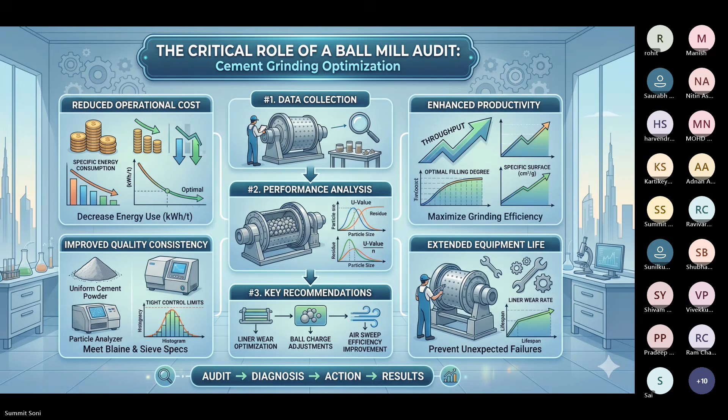Moving on to next - why we do an audit. As we all know, this is basically about numbers of energy consumption in the plant. If we see the energy consumption for the grinding of cement, it is almost 40 to 50% of the total requirement. Since it is so high, it takes most of the OpEx in terms of energy for the plant. So why not strike there first? If you optimize your grinding, you get to reduce your production cost and produce a good quality of cement, so on and so forth.

So, as I was explaining earlier, why do a mill audit? It gives you a very big picture on how your mill is performing. Once you understand that, coupled with your objectives, you can always decide when, where, and how to do the audits. If you want to go for an expansion, unless you know how your mill is performing, any expansion cannot be justified in terms of numbers.

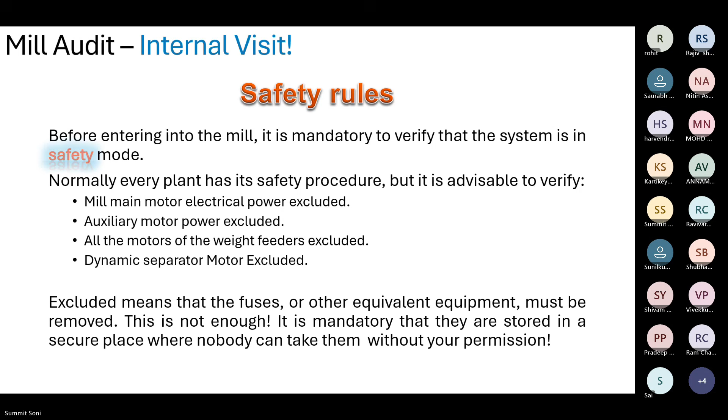Once we exclude it, the owner of the audit should appoint someone responsible for making sure it is locked, tagged, and logged, and it remains in his possession until the audit is over, until samples are collected and taken out of the mill. All collection equipment has been taken out, the sieves have been taken out, there's no plastic bag left inside, not a single shoe should be inside. That's his responsibility to do—usually the HSE guys.

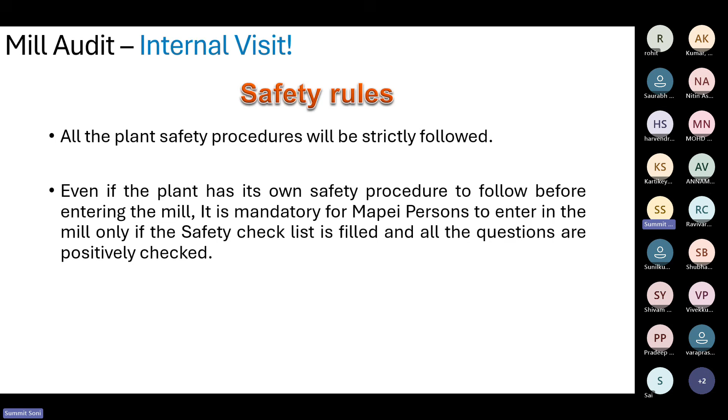Now, audit prerequisites. Any questions till now?

Is the speed okay? Can you guys hear me? Okay, okay sir, okay, perfect.

Now, the audit prerequisites—what we need to run the audit. We just can't decide, okay tomorrow we need to do an audit, let's stop the mill at 12 midnight and get inside at 6 a.m. We need to have a synopsis of the mill operation before.

Usually what I ask the client is for a 2 week log sheet. I study the trend myself, and on the day of the audit, based on that 2 weeks of data, we ask the client to run the mill for 6 to 8 hours at a consistent feed rate, constant separator speed, consistent product quality, no product change, no switching from OPC to PPC to SRC, and the least operator adjustments during this time.

So we try to put the clinker from the same silo. Extraction will be from the same silo, no changes there, usually fresh clinker. The gypsum quality won't be changed—if they're using chemical, use chemical, if they're using natural, use natural. No mixing or whatever, it should be consistent.

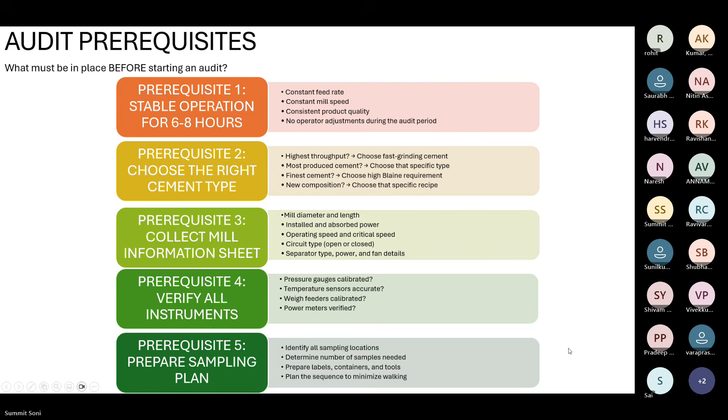Good, so moving on to the schedule of audit, the next slide. When we are starting an audit, there is a certain timeline which we need to follow. So before, let's say, that starts 6 to 8 hours before the running of the actual audit, we run the mill stable, we collect the data.

Before the shutdown, 2 hours prior to that, we visit the control room. We see what's going on in the last 24 hours, how the trend was, what the alarms were - was there any temperature alarm, any vibration alarm, and so on and so forth. Was the mill seal working properly? Is the temperature of the mill seal working properly? What's the mill outlet cement temperature? All those things we need to understand.

Current feed parameters, speed of the separator, fans - has there been a big change in the fan speed or the separator speed? Then we go around the mill. We note down the points where we can see there is false air entering. We identify the points from where the cement is leaking, let's say, and where the spillage is. So all those things we need to understand - leaks, vibration, hotspots, blockages, all those things.

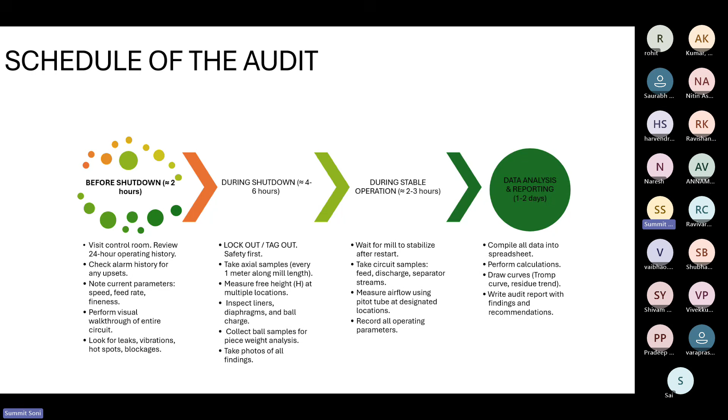Moving on, when we do a mill audit, internal visit, obviously. So the minute that we are entering the mill, the first thing we see is the level of ball charge, the level of material on top of ball charge, the mechanical maintenance state of the mill. Is there a liner that is hanging? Is the diaphragm clean? Is it choked? Is it broken? So on and so forth.

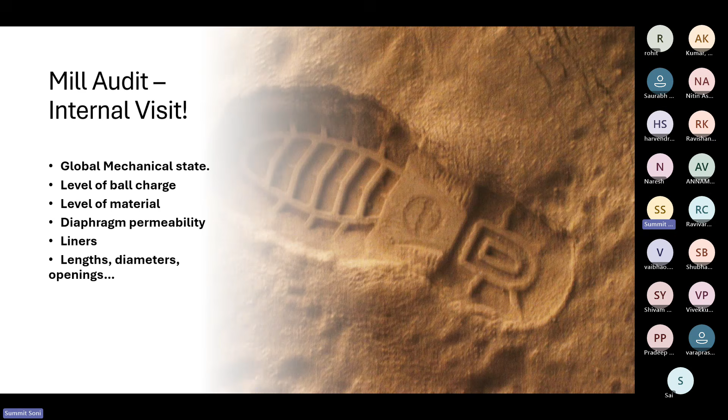Once we are in, we measure the length, breadth of the mill and all those things. Now, optimum material level in chamber one - this is chamber one and chamber two. Now this is a parameter which gives you a first hand review of the mill just by looking at it.

The minute you enter the mill, let's say the first chamber, and you see that all the balls are visible - 90% of your top balls visible - and there's not a lot of material next to the diaphragm, it's obviously not in a very good state of grinding. In the juxtaposition, if the balls are completely covered, you can't see a single ball and there's a lot of material in the mill, that's also not a very good case because then your mill is not grinding - it's being suffocated.

Same thing in the second chamber. The minute you enter and see the level of material on top of the ball, it should be somewhere around 40 to 50 mm on top of the ball. If it is around 50 mm, it's the perfect condition. Your mill is getting the right amount of feed, it is doing the right kind of grinding, the first chamber is doing the right kind of grinding, your diaphragm is doing good - there is no jamming, no choking, nothing.

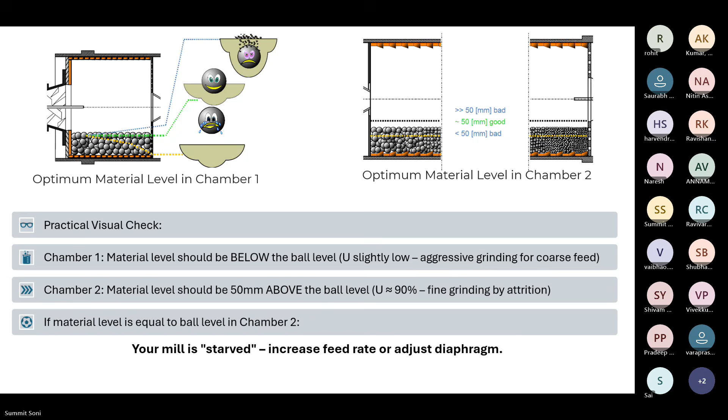Now, when I talk about a mill audit, when I decide to do one, we don't go all ballistic on the mill. I never advise doing all the analysis that is written in the book. Don't do a piece weight every time, don't do a complete flow measurement right at the first step. Very practically, I would advise two or three things to understand the mill and see what needs to be fixed.

Second thing, again, is filling ratio based on voids. If your ball charge is expanded or not expanded, that will also tell you how your mill is operating. The third exercise is axial sampling. When you do the axial sampling, the residue trend, you get to understand how your mill is grinding across the length.

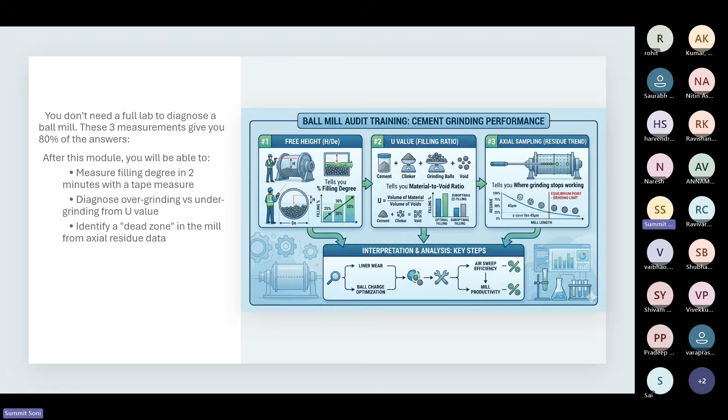So I'll go to the first measurement and we'll discuss a bit on that right now. What do you need for this measurement? You just need a tape, that's it. You access the mill door during the shutdown, you go inside, and you just measure the free height.

That's the distance from the top of the ball charge to the top of the liner, or your reference point. It's usually the top of the liner, the middle part of the liner where the wave is in the middle. So you don't measure at the highest point of the wave, and you don't measure at the lowest point of the wave—somewhere in between, if that allows. If your perpendicular direction hits the top of the wave, make sure you measure all across the length of the mill on the top of the wave, on the liner. This is the most basic confusion people have usually.

Now, once you've done that, you will measure the internal diameter of the mill and divide the free height by the internal diameter to get the h by de ratio.

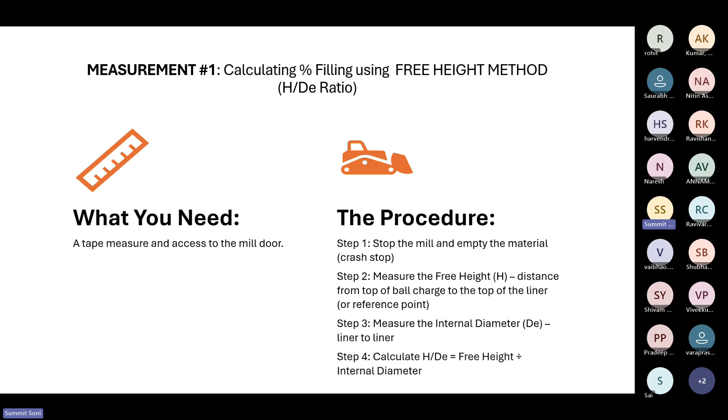When you have the h by de ratio, you can use this table, which is available everywhere, to determine your filling percentage. Rule of thumb: if it's below 28, it's not adequate. If it's more than 35, your mill is choked. Once you do this, you have the first picture of the mill—whether your filling is optimum or not. If not, in later steps, you can understand why.

If it is overly filled, you can check if there's ungrounded material stuck between the balls in the voids. That can be one reason why your ball charge is expanded and your filling degree is less. Or you've just put in a lot of material or grinding media.

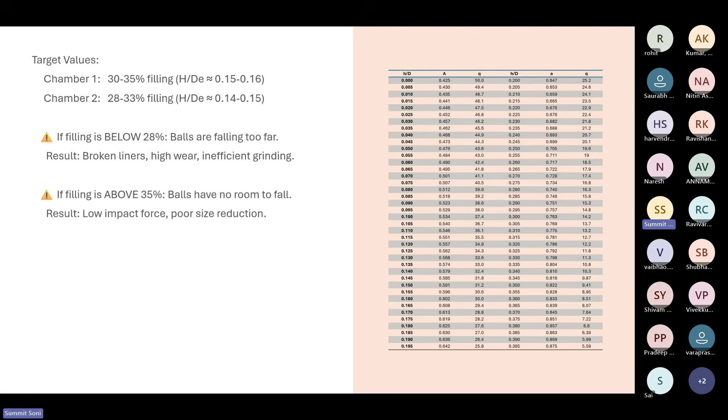So this is where we discuss that. Moving on, we go to the second measurement—that is the optimum filling ratio.

The optimum filling ratio is the volume of material in the mill divided by the volume of voids in the ball charge. The U value is basically a fancy way of asking a simple question: how much material is inside the mill compared to how much empty space exists between the balls? The formula is there on the screen, but I'd explain it in layman's terms.

Imagine you have a jar full of tennis balls. Even though the jar looks full, there's a lot of empty space in between the balls, right? That empty space is the void. In terms of a mill, it's almost around 40% of the volume that is void space. Now let's say you're pouring sand into that jar of tennis balls—the sand will fill the voids in between. The U value is simply the volume of sand divided by the volume of voids.

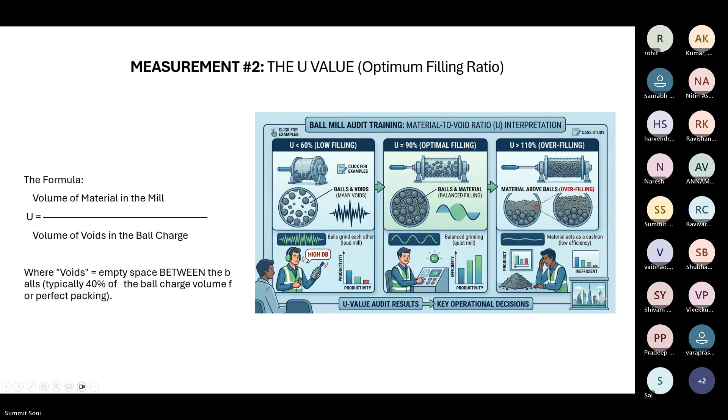Moving on, the third measurement, which is the axial sampling. We will be discussing this quite a bit, and this is the most powerful tool for estimating the efficiency of any ball mill grinding. This will basically be an X-ray of your mill, telling you exactly at what meter the grinding is happening, and at what meter the grinding is not happening.

Now, what you do is basically during the shutdown, we stop the mill, as you can see in the picture. We'll go inside with the sample collection packets and with the people, and we start taking samples every 1 meter along the length. There is a way to take the sample as well: you remove the balls, make sure that you are at least 10 to 12 inches below the level, and then you start taking the samples.

You take the samples from three parts. So basically, if you consider this as a cross section of the mill, over every meter you take three samples, and over the length of the mill you take samples from.

You have to ask them whether they know about crash stop or not, how to do the crash stop. You have to ask the participants.

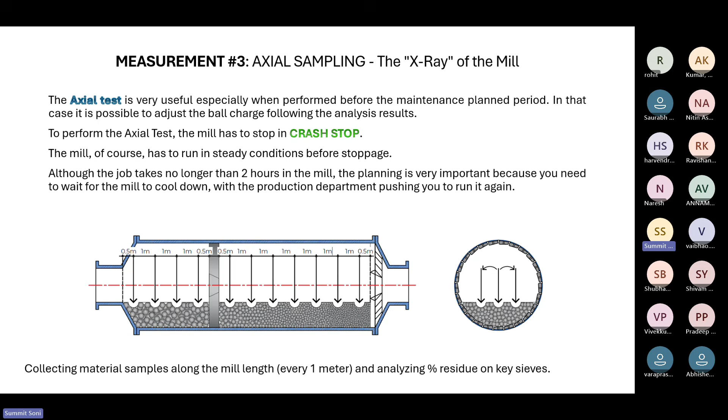Once you start doing that, you will start creating a database of your plant in a way that everything correlates to everything else. And believe me, there is a relationship between any data and every data.

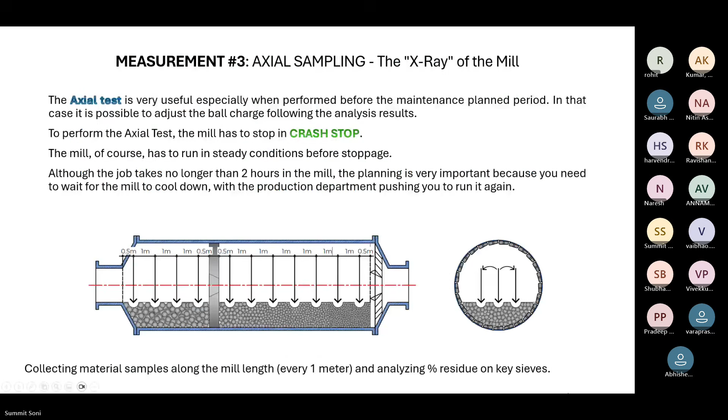Okay, we have taken all the numbers, we have taken the axial sampling and all those things now, and where we reach is how we design the ball charge. I will not dwell on it now; in the next slides I'll dwell on these things as well. But this is just a snapshot on how we determine the maximum ball size going into the first chamber and second chamber.

We have our famous Bond formula, work index calculation, to calculate the maximum diameter. Usually we take the mill inner diameter, the K factor is usually a constant, 350. We consider the RPM, and the critical speed is calculated based on the mill RPM, and we use that in this calculation.

Along with that, we also take the granulometry of the raw material going into the mill, and we consider the Bond index based on the various raw materials. Let's say for limestone, we have taken 10.18. Clinker, we are taking 13.49. And so on and so forth. It's a simple Excel sheet, but it is very crucial to start when you're starting your ball charge design.

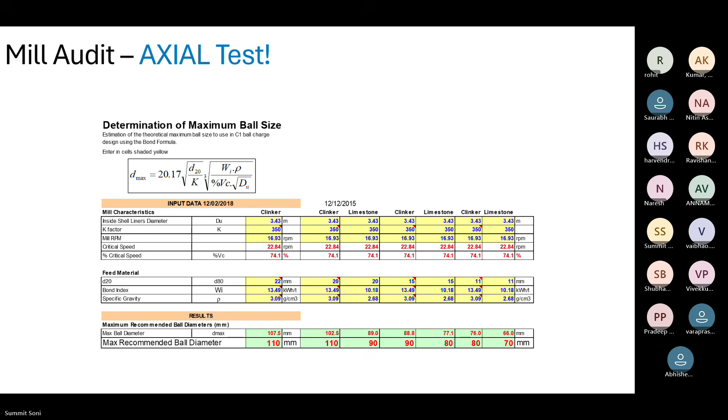Moving on to ball charge design. How much time has it been? Guys, are you comfortable, or do you want to do this in the next presentation? Hello?

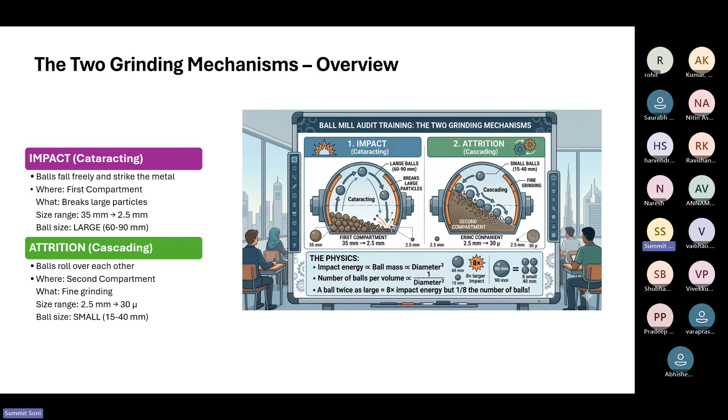So, do you have any doubt? If anyone has any doubt regarding this, whatever he discussed, because today he discussed so many things about the crash stop and how to do the sampling. These are very important things. If you don't know how to do the sampling correctly, then you are not able to analyze the chamber sampling analysis. Because depending upon the chamber sampling, you have to finalize how much grinding media you have to put in the mill. So if anyone has any doubt, they can ask.